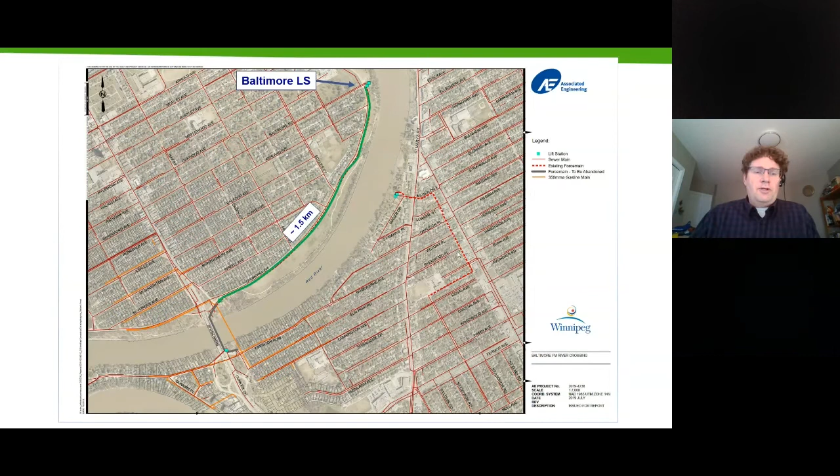So here's just a look at the rest of the system in place. We have the Baltimore lift station up here in the north, which would pump through a 1.5 kilometer force main to get to the actual St. Vital Bridge crossing. There's where we had the actual Baltimore force main crossing itself, and then it would again go by gravity or force main kind of gravity back up here to the Mager lift station, and then it would be pumped into this dash line to get into the rest of the system.

So when we're taking a look and developing options to replace this, some of the things that came up is that we noticed that we have this lift station up here in the north. We're actually pumping just over here, but in the end we got an extra 3 kilometers of pipe that takes us over to the Baltimore force main crossing. So these kinds of things came into play, and we're looking at different options, like can we short circuit this and just directly deliver from Baltimore to the Mager lift station and avoid 3 kilometers of this force main?

So we're going to move in and start talking here about some of the different options. I'm fast tracking some of the front end stuff because the back end stuff was much more exciting in terms of the concept design.

So how we did the concepts was we looked at various options. This is part of the decision-making process: we develop these options, take them up to a concept level of design, put together a description of how it works, pros, cons, and then put together a cost estimate so that we can actually make some decisions or help us make our decisions.

So the first option is relining with cured in place pipe, which is taking the existing pipe and just putting a liner through it. Slip lining is putting a structural or flexible liner through this. Replace in kind is essentially taking it off and putting it back exactly the same way. All these things had, on the piers, some cradles for the pipe that would have to be replaced.

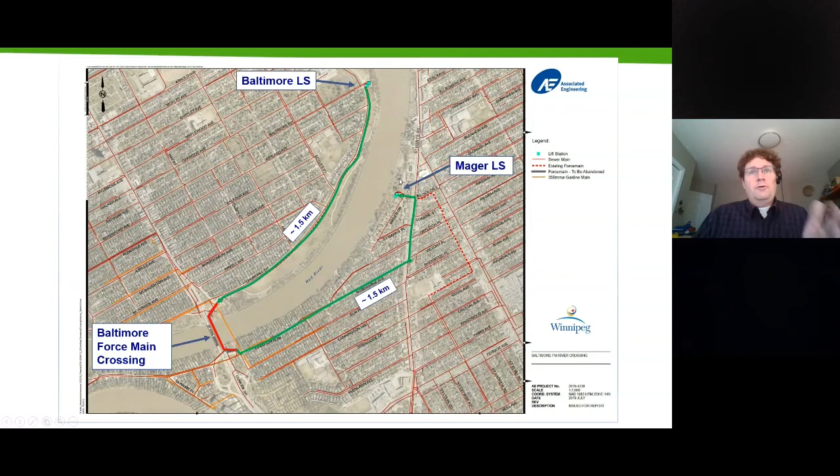Option 4A and 4B is microtunneling. 4A was, going back here really quick, the alignments closer to the bridge. The B alignments are trying to do the short circuit going from one lift station to the next. So that's where that A and B option comes into play. We had A and B options for microtunneling and directional drilling, and then we had the weighted pipe option, which was essentially to put a weighted pipe, high density polyethylene, across the river to convey the flows.

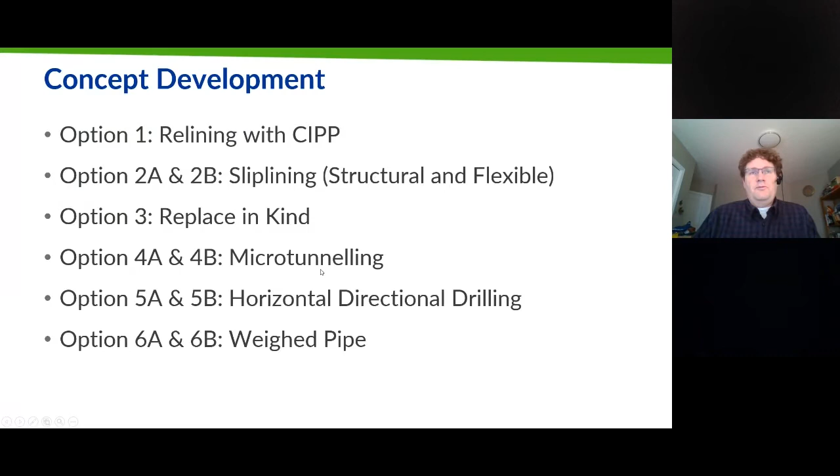Now we get into it, skipping a whole bunch of steps, but in that process we developed some evaluation criteria specific to the project, working with stakeholders and the owner. We developed these criteria which we want to evaluate the different options against each other. We take the evaluation criteria and do what was called a pairwise comparison, ranking those against each other to determine which one is more important, and how much more important.

That leads us to developing a weighting, and you can see here that we get a weighting for these different criteria. In this case, with the stakeholders and for the purpose of this project, operation, maintenance, performance uncertainty was one of the highest weighted criteria when it comes to making a decision. Things like social impact, infrastructure security, and schedule were lower. It's not that we didn't care about them, it's just that the group felt these other criteria were more important and had more weight on the overall decision-making process.

So then we have our different options listed on top. We have quite a few of those, and we go through as a group and compare. So in terms of environmental impact, which option would have the least environmental impact?

And so we give that a high score, 10. Then we come back and compare each of the other options to our initial high score to determine how they relatively compare in terms of that criteria we're evaluating. In the end, what we get is if we do a sum product where we multiply the weighting by the score given, we get the total criteria score down here in the bottom. In general, the one with the highest criteria score would be the one we preferred to take forward into preliminary design, detail design for the project.

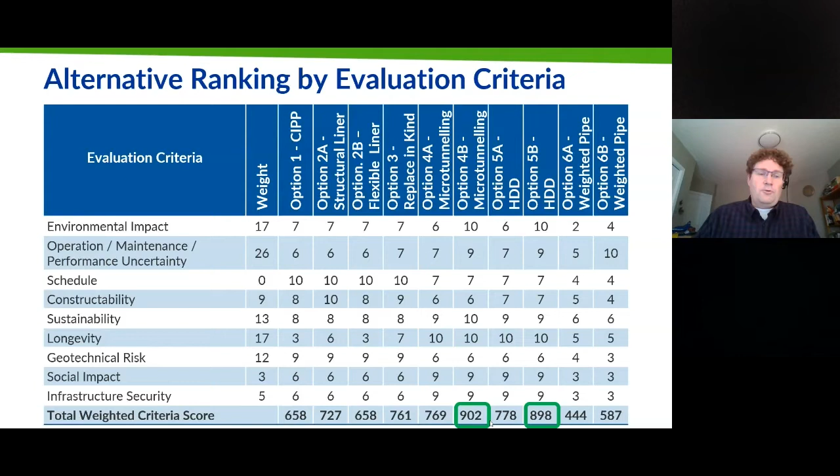So here we see that microtunneling option 4B and HDD option 5B were the highest rated criteria options based on the criteria and process we went through. Those are the options that were short-circuiting the installation.

So we go through and now we do what we call a value ratio, taking the estimated capital cost of construction and the total weighted score divided by the estimated cost, and we get the value ratio. You can see the flexible liner comes out at 233, and the higher the number, the better. So right away we see some issues: the ones which ranked highest in terms of options aren't even close when it comes to value ratio. It gives a bit of a contradiction.

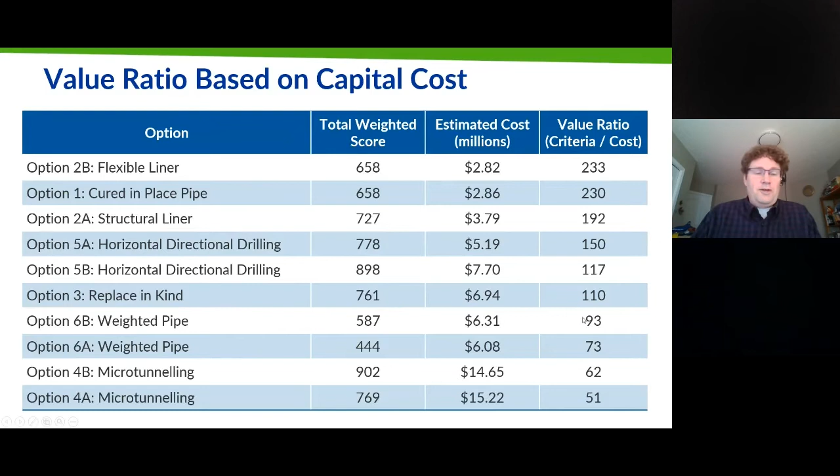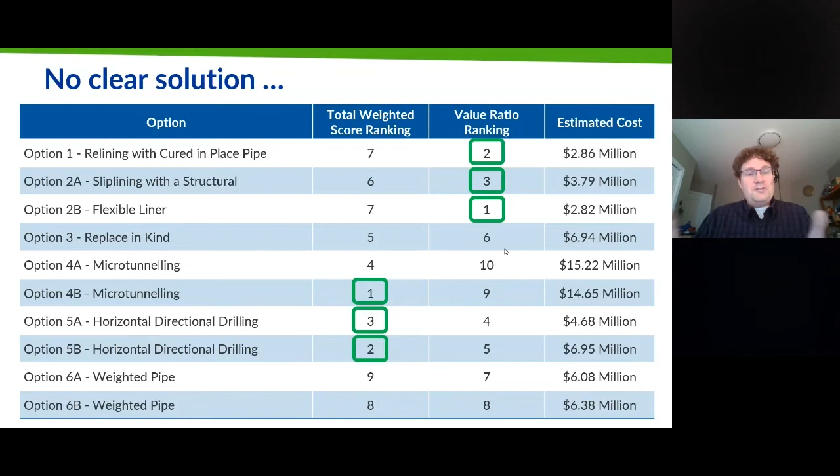So we need to go in and do some additional investigation. Here we can see the options on the left, with the total score ranking from the criteria — just a numerical ranking. Microtunneling 4B had the highest score. In the value ratio ranking, the flexible liner had the highest score. You can see this discrepancy — none of our options actually line up in terms of what's great from a criteria perspective versus the value ratio perspective. So it's like, well geez, what's going on here? It doesn't always happen, but it requires you to do some thinking to make sure we're making the right decision.

What comes into play is that each of these options is a little bit different. Some of the short-circuiting options had a definite impact on the long-term operation and maintenance costs, because if we're short-circuiting and we don't have 3 kilometers of forcemain, that changes how those pumps act and the maintenance and activities required by the city to keep the system working. So we looked at the total life cycle costs, because they're not all equal — some would be a short-term solution with maybe only a 10, 20-year design life, meaning we'd have to do something again. Others, like the drilling option, had a 50, 75-year design life. So there's various differences in terms of design life and operational maintenance.

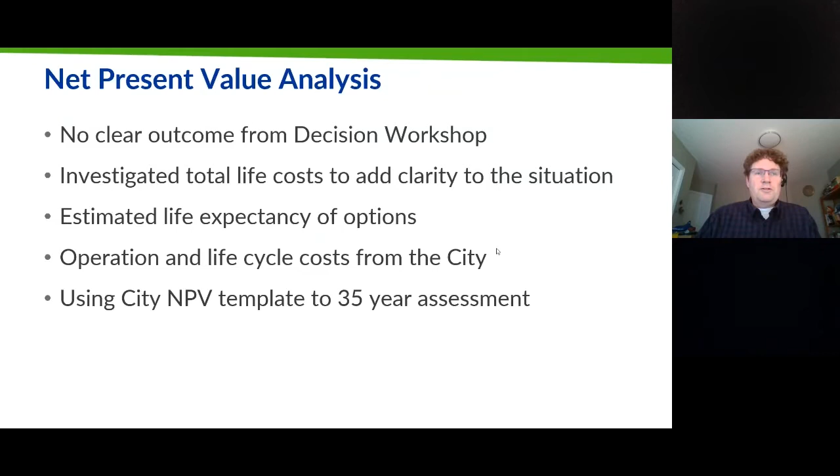So we go through, and Cynthia from the city used a net present value template for the 35-year assessment. Once we did the net value assessment, it started to make sense. Again, we have directional drilling coming in as the preferred option — 5A being more or less parallel to the bridge, with option 5B being over closer to the lift stations. Then it became clear that the next best was the replacing option.

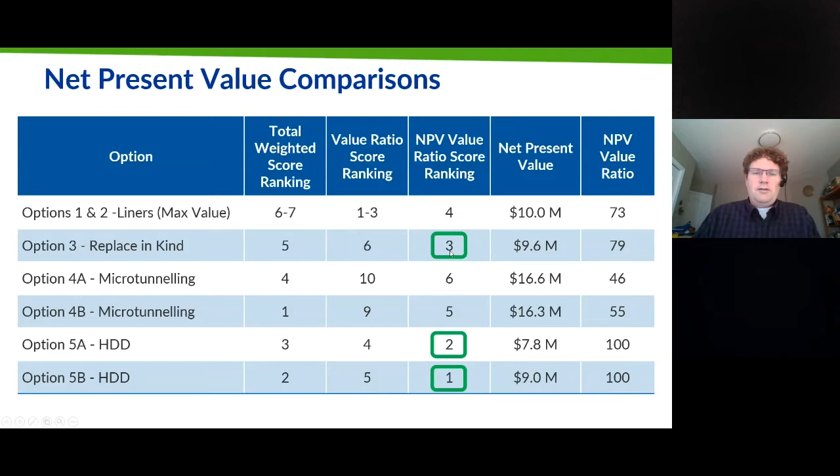All right, so we're still moving forward thinking we're doing directional drilling — things are going great. Now we start doing the concept validation. We reviewed options 5A and 5B, and looked at option 5B initially because it seemed to have the greatest benefit from an operational maintenance perspective, since we're short-circuiting it. Option 5B was about 540 meters in length and had a bit of complex geometry, which I'll show you right away. We had some concerns about that geometry.

There's one thing to put things on paper, and that looks kind of nice. The City of Winnipeg has some interesting geotechnical and geological features, with overburden material over top of bedrock, which does cause some issues. And the bore path we proposed was fairly complex in terms of both horizontal and vertical curves.

And so we brought in a contractor to help us do a constructability review, to make sure we weren't crazy moving forward.

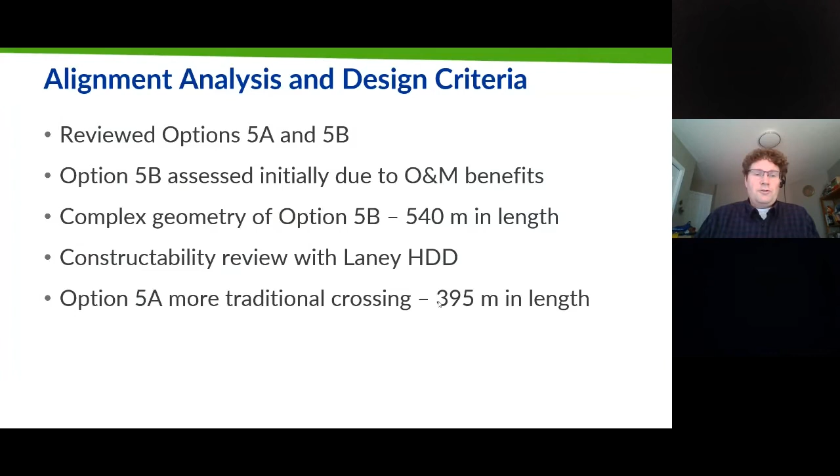Option 5A was much more traditional in terms of a straight profile, and it was just under 400 meters in length. So here's option 5B over here on the right-hand side.

On the north side, the top side of this picture, you can see the major lift station. There's a lift station up here, and then we come down to the major lift station down here on the left-hand side. And so the entry here, and complicating this also, was the slope stability.

There's a lot of erosion occurring here and instability in these banks along the Red River, and it kind of forces us to put our bore path in a location that's not going to be impacted by the slope stability. So we couldn't do a traditional straight across. We had to come in parallel on the entry and then start doing our curves underneath the slope stability.

By this time, we were going to be in bedrock so that we can do all our steering within the bedrock. And if we knew we're in bedrock, we'd be out of that slope instability area. So that's where you get this bit of horizontal curve and vertical curve occurring at the same time, just trying to avoid that slope stability.

So this was option 5B, and we're going through to do the feasibility of this.

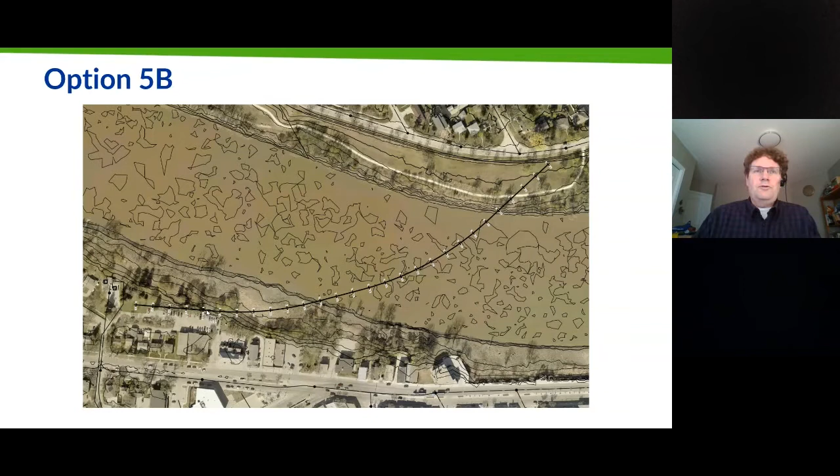Option 5A was much more traditional. There's nice working space on either side in these green spaces, and that allowed us to do just a straight shot going across, just under 400 meters.

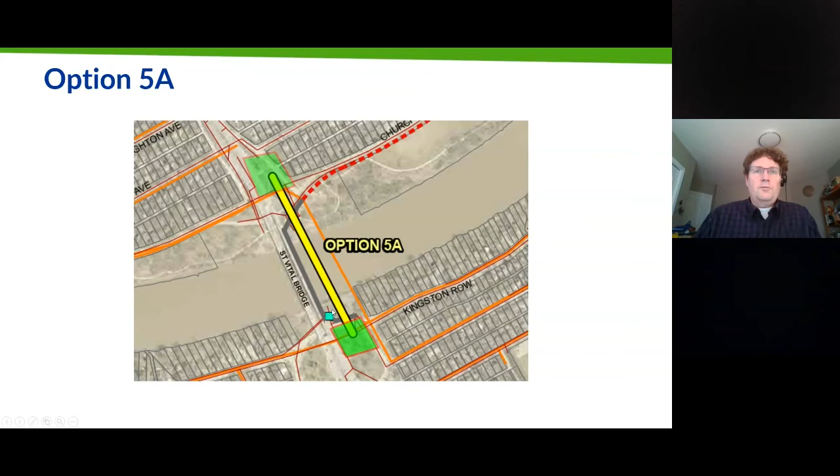So we go out, do the site reconnaissance, we do the riverbank stability, and identify locations for geotechnical investigations.

Essentially, and I guess I missed one point here, is that when we got into option 5B and started looking at the workspace and the constructability, we didn't get good reviews from the drilling contractor. And so that kind of forced us to consider that if the contractors are not saying this is feasible...

We can't take that design. And really what the feasibility comes down to is trying to make those complex steering arrangements within the bedrock. And they were concerned that they just wouldn't be able to make some of those things work.

And that was before we had geotech even. So we kind of knew from other work we've done in Winnipeg. We've done another crossing further down by Chief Peguis, the bridge there - the Kildonan Forcemain crossing. So we knew the geology there, and we understood that the bedrock was kind of complex.

So then we said, okay, option 5B is off the table. Let's go to option 5A now. And so we focused our geotech on option 5A.

So we got 2 boreholes, 46 meters in depth. We had the profile already set up so we can tell the geotech to get down to their appropriate depth. Samples were taken to determine the relative strength, the gradation, the plasticity, and the abrasivity.

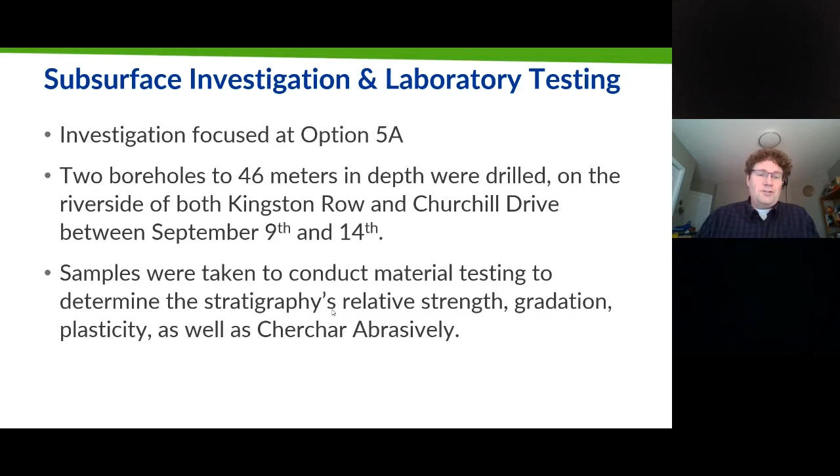And those are things which are important from a contractor's perspective, so they can understand what tooling they're going to need. It's very important - we're not doing a geotechnical baseline report here, but at least we're getting some information to the contractor so they can size up some of their tooling needs.

Soil stratigraphy, no surprise here: clay, silty clay, silt, sands, gravel, bedrock. Trek Geotechnical, local there to Winnipeg, did the report.

One of the things that kind of came up here, though, is that the subconsultant that did the drilling - we had conversations with them, and the words were 'never seen this formation before in Winnipeg, the most difficult drilling we've ever encountered in Winnipeg' - raised a few alarm bells, right?

And it really came down to the fact that in this location, there's a fairly unique formation, alternating between very competent hard material and very soft rubble material. And the issue here is that from a steering perspective, even if you're trying to get down, if you're skirting across these hard layers, you're going to extend.

You won't have the steering response you're expecting. And then you get into these soft rubble layers, and all of a sudden now you've got circulation issues - you can't maintain the circulation inside your borehole. And everything was hydraulically connected, so there could be potential for some frac-outs. And again, they had significant difficulty drilling the boreholes.

Here's just a cross-section of the area here. Here's the inferred bedrock contact layer. And you kind of see, you got the clays, you got the tills, and it was this layer here.

Realistically, I'm not sure if we would have looked at the geotechnical report on its own, without talking to the driller, if we would have interpreted it the same way. So a lesson learned from us is that it was important to talk to the driller that was actually doing that work to get that hands-on experience and understanding of what the ground was doing. That was a real lesson learned there, that the benefit of actually talking to the geotechnical consultant in this case really led us to understand what the difficulty was and what the concern was moving forward on this installation.

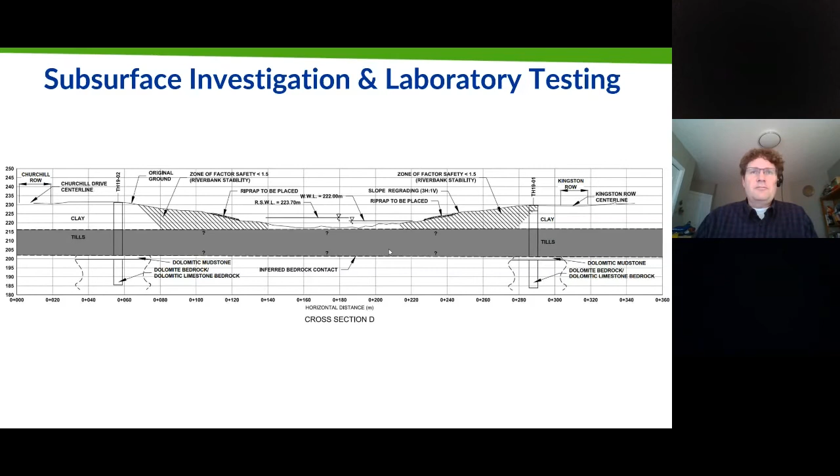One of the things that really causes us a lot of problems sometimes is not getting geotech at a sufficient depth. It happens to us all the time. We have an open cut project where we need to make a quick change and move over to do it by trenchless, and we get in a situation where the geotechnical information we collected for the open trench type operation is not deep enough or doesn't have the applicable parameters that would be used from a directional drilling design perspective, or to give the contractor the right information to plan their installations.

That's where, working with Trek, we determined what that bore path was and said we need these boreholes being 46 meters deep. I think it was even maybe a little bit deeper, because I think we're drilling at maybe 30 meters deep. This gives us an opportunity to get to know what that ground is below the proposed bore path.

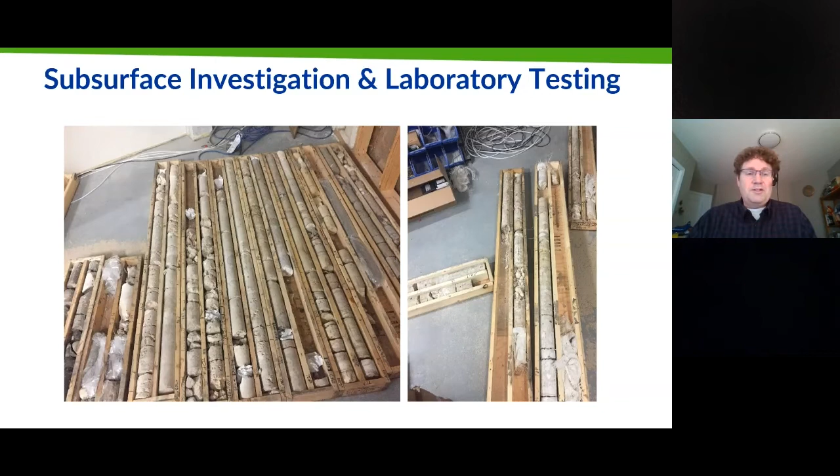All right, so subsurface investigation. Might just summarize some of these things again. So, concerns of the formation: I talked about loss of circulation. In terms of the amount of fractures, we may have issues trying to keep the borehole full of fluid. And the circulation, again, it's not because of frac out. It's just because we want to make sure we have circulation. If we have circulation, we can keep flushing the cuttings out of the hole.

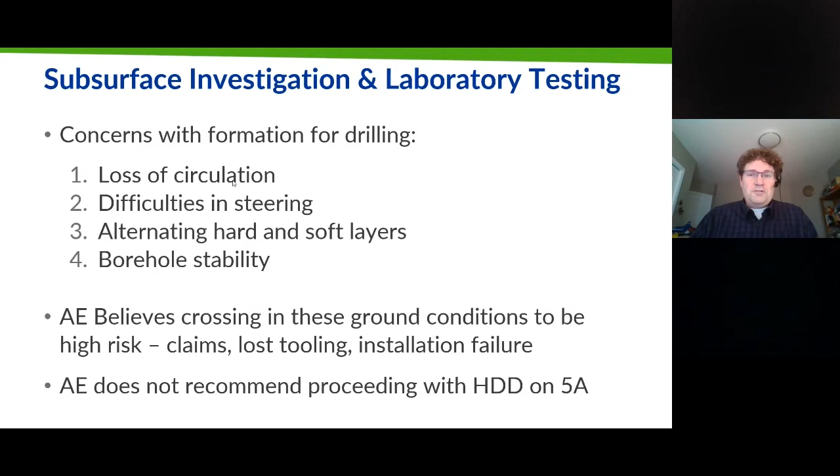So that's where that loss of circulation comment comes in. Difficulties in steering, we talked about that, the alternating hard and soft layers, and then the borehole stability. So at the end of that, unfortunately, we had to conclude there was a high risk of drilling this, in terms of potential claims from the contractor, losing tooling down hole, and even installation failure. So we actually had to recommend against directional drilling, and unfortunately it became a non-trenchless project.

So we did have some geophysical survey that was going to be on order. But really, once we did the boreholes, we came to the conclusion that based on what we saw there probably wasn't any real reason to do the geophysical. It wasn't going to tell us anything more. In particular, in terms of the way the layers were set up, geophysical is great to identify those massive or significant changes between soil consistency. So if we have these alternating layers of hard and soft, I don't know if it would have really defined anything more than we knew from the boreholes.

So then that's another lesson learned here, about that staged approach to doing geotechnical investigation - really taking the geotech, analyzing it, and then making a choice moving forward in terms of if we need more geotech or a different thing like geophysical.

So, conclusions, recommendations. We revisit the net present value, and in the end, when option 5A and 5B didn't turn out, the next best was a replace in kind. City of Winnipeg, I believe this is the option they're pursuing right now, and it's been a while.

The City of Winnipeg had to set up an emergency kind of bypass, or temporary bypass type situation, over top of the bridge. So they've unfortunately been moving sewage to the forcemain on the bridge for at least a year and a bit at this stage. The benefit of having that there is that once the replace in kind is moving forward, at least that bypass is in place, and it's one less thing for the contractor to worry about. So that is underway, I believe - I'm sorry, I didn't check on the status of it actually.

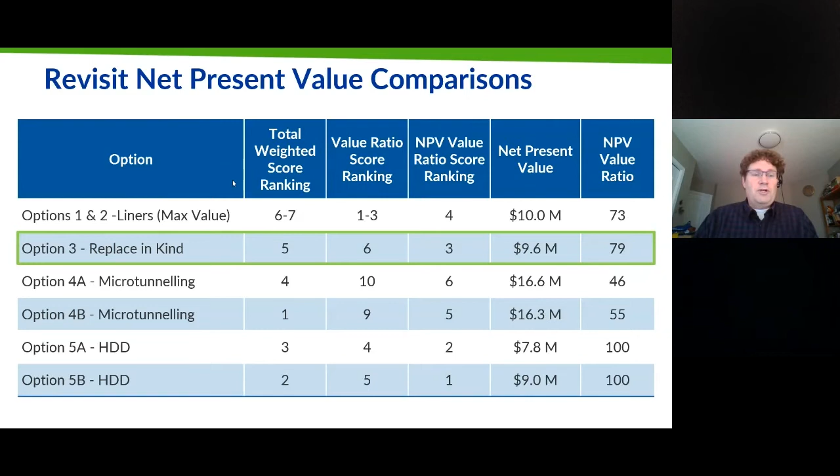All right, so conclusion and recommendations: abandon the HDD crossing at option 5, proceed with option 3, replace in kind.

That's right. Thanks very much, Carly. Appreciate the intro, and welcome all. Thanks for joining me and for the opportunity to present on behalf of our team here. So I've been designing water supply infrastructure in Metro Vancouver for several years now, but I'm normally called in at the detailed design stage, and getting involved at the ground level for the Cambie Richmond water supply tunnel has really demonstrated to me the power of GIS for decision support.

So I hope I can convey some enthusiasm for the approach we've adopted here. I'll give you a view of the early stages of conceptual design, starting with background and scope, conceptual design objectives, and going through the spatial decision criteria. I'm going to roll out some of the multi-criteria spatial analysis figures, the results of these analyses, and our next steps.

The Cambie Richmond tunnel is intended to be an extension of an already well-established water supply network. This corridor has been an important artery for transmission mains since at least the 1950s, with mains from the north conveying water from the Seymour and Capilano watersheds to South Vancouver and through to the cities of Richmond and Delta via existing Fraser River crossings.

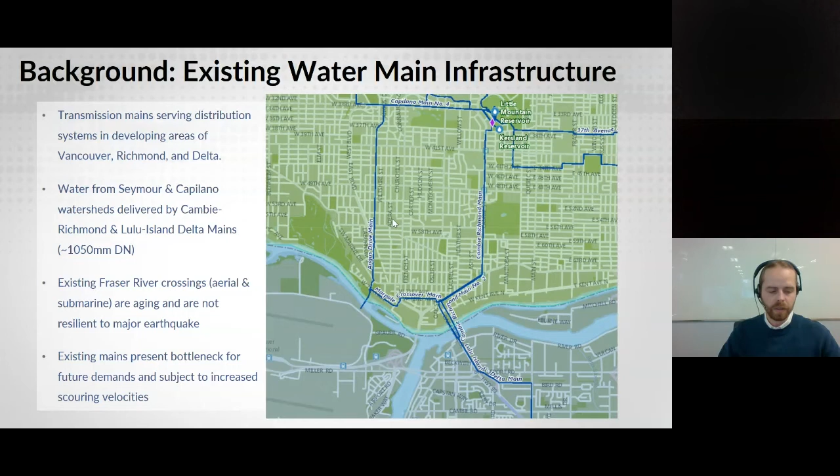As you'd expect, these areas are rapidly urbanizing with Canada Line SkyTrain stations on both sides of the river. Careful water planning has been undertaken to project demands out to year 2121, and these existing crossings present a bottleneck in the near future. Existing infrastructure is aging, and seismic resilience is a concern, so these are to be designed for a 100-year horizon and to modern seismic criteria.

And at the end of the day, large diameter open cut water mains need to be established to tie in the tunnel into the existing supply and outfeed.

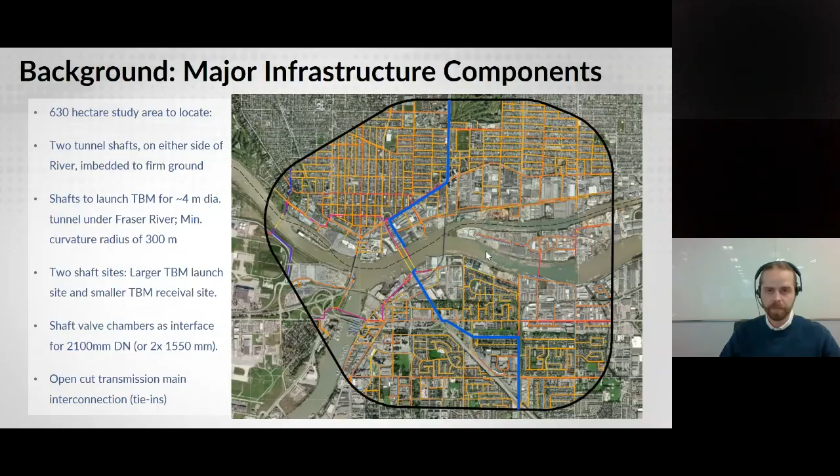So the primary undertaking for evaluation of shaft site locations is no simple task for a 630 hectare study area extending across 2 municipal jurisdictions.

To begin with, we compiled decision inputs from regional and municipal geospatial models, the majority of which is readily available free data. We integrated situational, geotechnical, and constructability considerations into our multi-criteria spatial model. This data provided the high-level view, but the real objective was to strategically overlay and manipulate these models to focus in on a long list of suitable sites.

Alongside reconnaissance observations, we collaborated with Metro Vancouver and our technical leads to shortlist 3 shaft sites on the Vancouver end and 2 sites on the Richmond side. And to further demonstrate their suitability, we developed conceptual plans and profiles for 4 potential tunnel alignments.

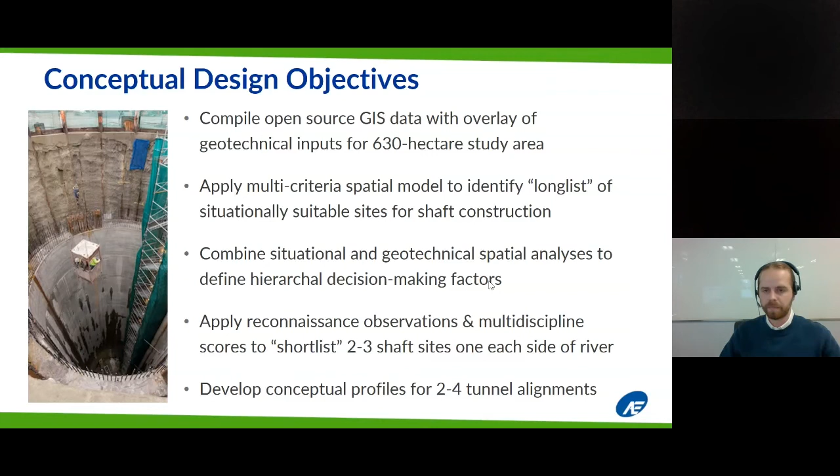Starting with the obvious one, we require adequate real estate for the shaft infrastructure, as well as construction laydown and access. We targeted industrial and commercially zoned areas to mitigate construction impacts on residential areas and also to allow for use of well-established haul routes.

We aim to optimize capital expenditure by minimizing tunnel length as well as length of open cut tie-ins. From a geotechnical perspective, we endeavor to find firm ground to embed these shafts. As you'd expect, shaft installations near the Fraser River will be affected to a significant degree by soft soils, so we target sites with shallower liquefiable layers to limit dynamic effects during an earthquake.

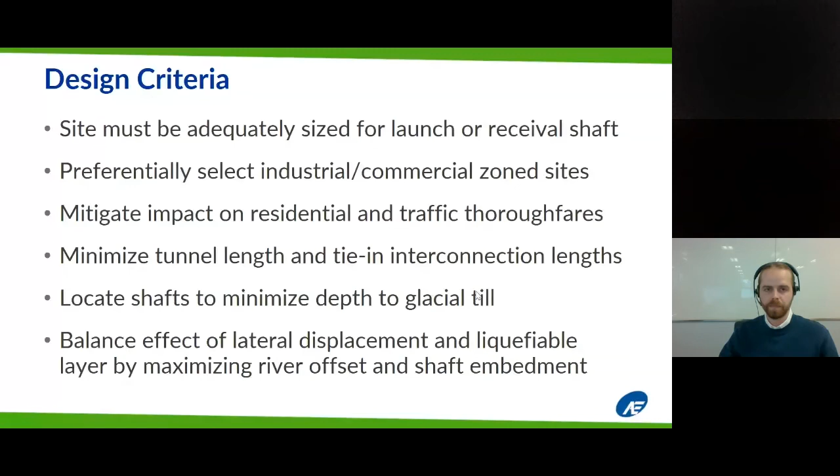So let's roll out some of the spatial data layers we use to illustrate these criteria. You'll notice on all of these maps we show the Cambie, Richmond, and Lulu Island Delta mains in blue as a visual indicator of the tunnel supply source and destination. Note that this transmission main generally aligns with the Oak Street Bridge, and in purple we indicate the alignment of the Canada Line SkyTrain. These are shown common to each layer because in the end we want to avoid threading a tunnel between the piers of the bridges.

At this point, it was prudent to consider registered sites with social, environmental, and archaeological relevance. We use this layer to make designers aware of things like heritage sites, schools, care facilities. We also masked off the riparian offset for the Fraser River, and on the left in turquoise we've identified a registered archaeological site.

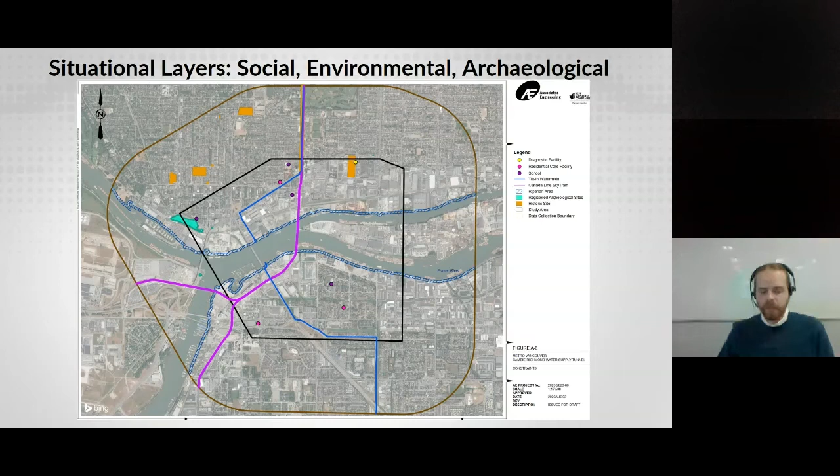So logically, we developed a no-go mask for areas we want to steer clear of. To this mask, we added the frequent transit development areas near the Marine Drive SkyTrain station, as well as the TransLink operation and maintenance facility on the Richmond side. This layer made it clear how congested these pre-developed areas are becoming. The challenge became even more evident during reconnaissance, as we found well-established industries and stratas have been replaced with new commercial developments like car dealerships and self-storage facilities.

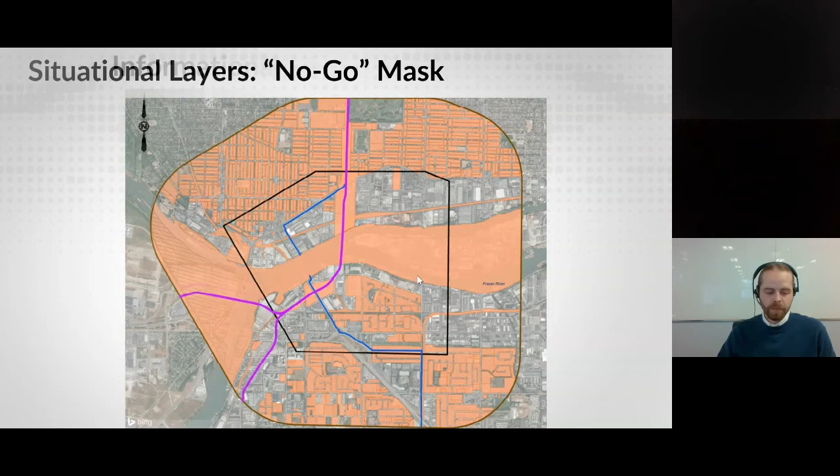So with the mask now laying out some more boundaries, we could begin the constructability conversation. With help from McMillen Jacobs, we defined the spatial requirements for construction of shaft infrastructure. We need at least 8,000 square meters for the TBM launch shaft, construction laydown, as well as muck disposal. And on the other side, we are looking for a minimum of 4,000 square meters for the TBM retrieval shaft.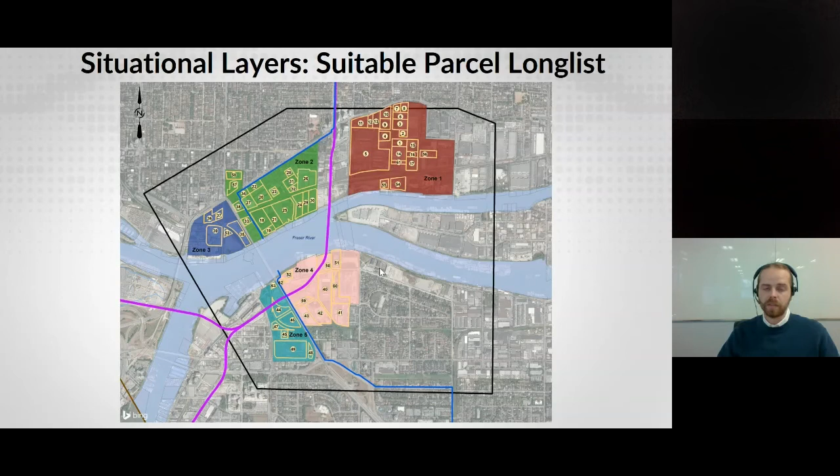So the obvious spatial model outputs will relate to length of tunnel infrastructure. And this would include the length for open cut water mains to tie in the shafts to the existing water supply. We developed spatial bands around the Cambie, Richmond, and Lulu Island delta mains. And each band is assigned a score, ascending with proximity.

For instance, a shaft site located closest to the supply is assigned a higher band value, and is shown in the green areas.

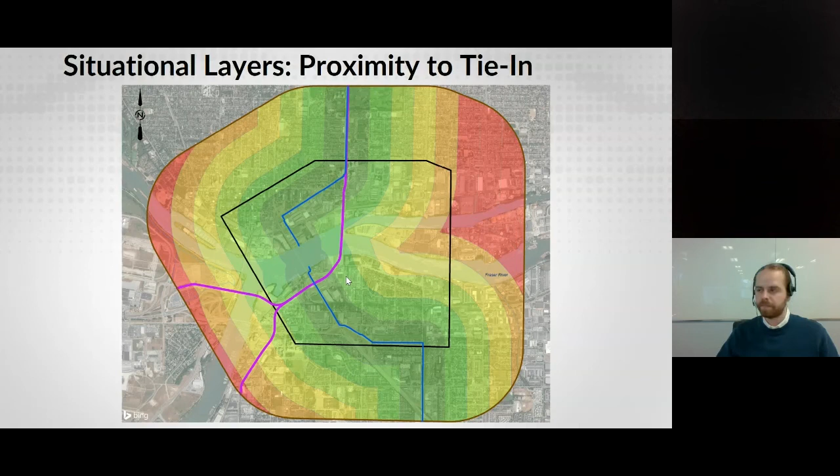Next up is tunnel length. And given that we were trying to align a tunnel between shaft zones that are directly across the river from each other, we generalized that shaft sites located closest to the river will result in the shortest tunnel length. Again here, shaft sites located in the green band are assigned a higher value.

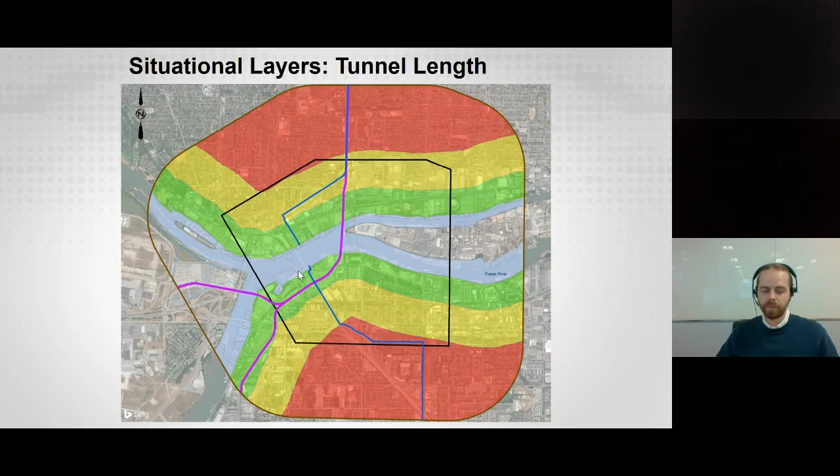Which brings us to our first multi-criteria layer. This is the combined situational analysis. Rather than reporting spatial values in a massive spreadsheet and straining the eyes of our collaborators and clients, we document these results of the analysis visually. And what we've done here is manipulated the value outputs from the land use, proximity to tie-in, and tunnel length layers, and we've assigned weights to each of them based on agreed upon design relevance.

You can see some clearly defined favorable areas beginning to arise here, especially near the river shore and along the existing transmission line. But using the situational layer alone might wind up locating shafts in areas with suboptimal geotechnical conditions.

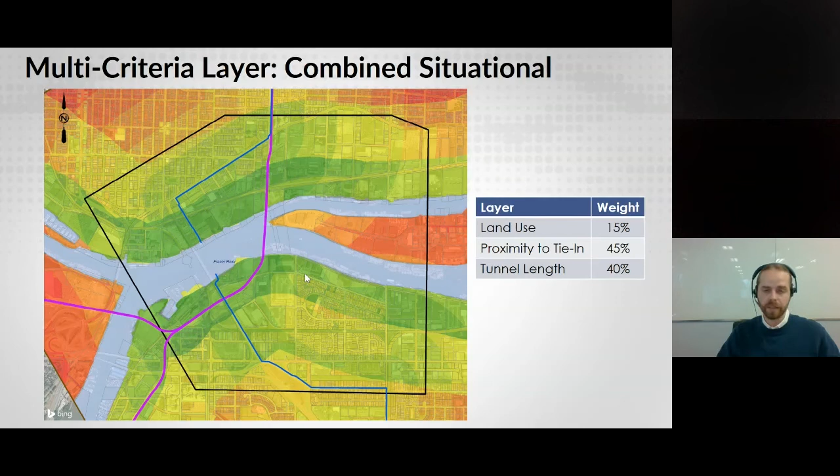So we turn to our geotechnical lead, Golder, to help steer the ship. And within the study area, we were able to pull geological data from a fair number of existing boreholes. Golder used Leapfrog software to develop spatial geotechnical models. As I understand it, this software essentially interpolates between boreholes to efficiently trend geological conditions across the study area.

So one of the most important geotechnical considerations is the liquefiable layer thickness. This includes soft soils such as river sands and marine sediments that are subject to lateral displacement in the event of an earthquake. If this liquefiable layer is exceptionally thick at the shaft site, the shaft needs to be designed with enhanced capacity to overcome lateral pressures.

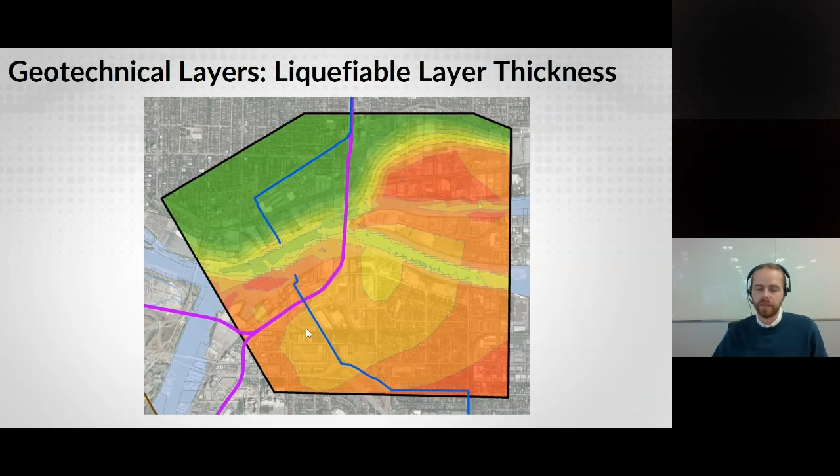And as you can see, there are some problematic areas in the northeast corner in Zone 1, as well as deeper pockets within Zones 4 and 5 on the Richmond side. Similarly to the situational layers, these contours represent a severity value, with red areas assigned lower scores.

Now, depth to glacial till is a parameter that our tunnel and shaft design lead is particularly interested in. They want to know how deep the shafts will be and how deep they'll need to be installed in order to embed them in firm ground. The green band indicates depth to till less than 40 meters below sea level, while red indicates till at greater than 80 meters below sea level. So that's quite an aggressive grade to this deposit from north to south.

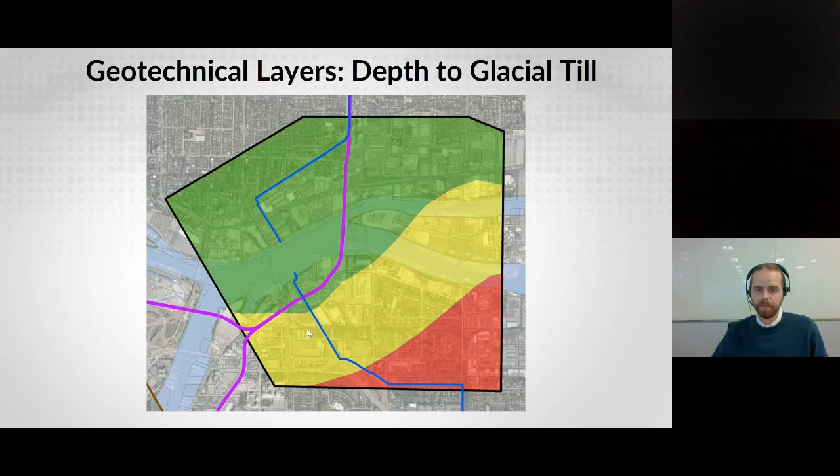Lastly, for our geotechnical layers, we spatially approximated the severity of lateral displacement. Illustrated here, the bands in red are displacements of greater than 3 meters. In yellow, it's between 2 to 3 meters. And in green, that's less than 2 meters.

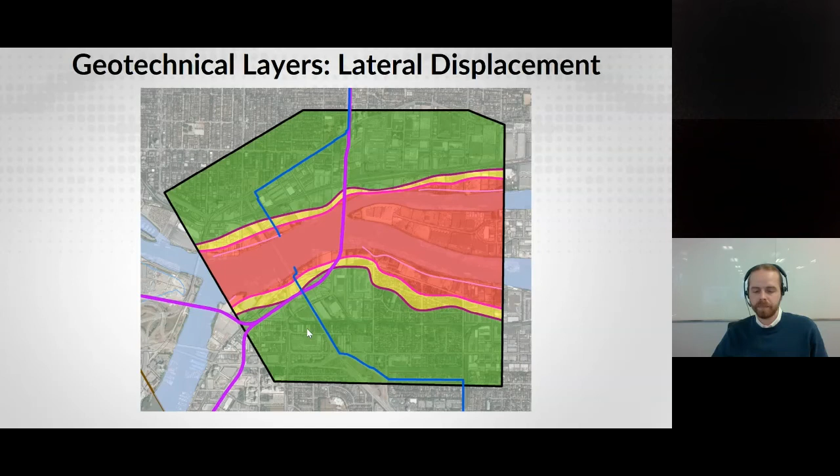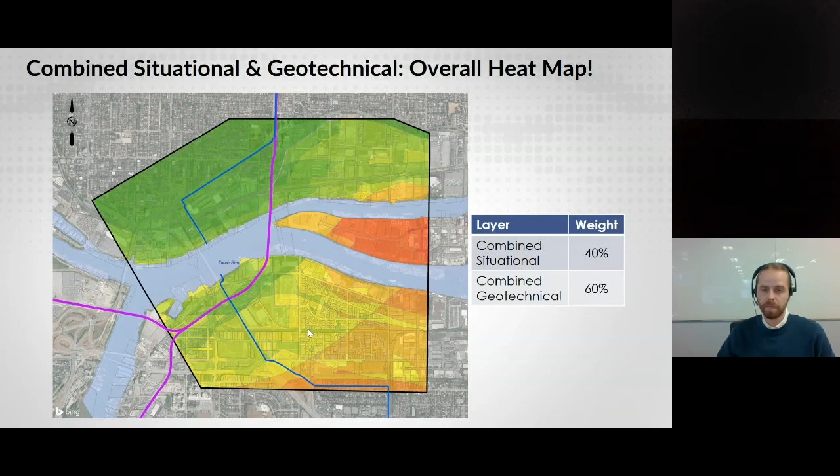So, results and next steps. Why go through the trouble of creating composite maps for site selection? Well, the real value comes from multidiscipline collaboration. And with these visual cues, we curb the tunnel vision you might experience if you're simply focused on satisfying discipline-specific design criteria.

To the team, you can more effectively communicate why you prefer particular shaft sites. Our goal here was to provide shaft site options. In the end, it's up to the client to select which ones, and these spatial figures provide a documented roadmap on how we arrived at these options.

These tools are essentially created to streamline the process of secondary screening, where we shortlist 5 out of 61 sites. We later had help from Metro Vancouver property specialists to weed out parcels that might be difficult to acquire. And later, through our site reconnaissance efforts, we visited most of the sites to see what was actually there, in some cases revealing that a parcel is now empty or redeveloped, or a railway spur has been abandoned.

Now, with the high-level composite maps and the secondary screening results in hand, we're able to hold a multidisciplinary workshop and agree upon the actual site selections. Between these options, we identified 4 possible tunnel alignments, all of this before developing any drawings.

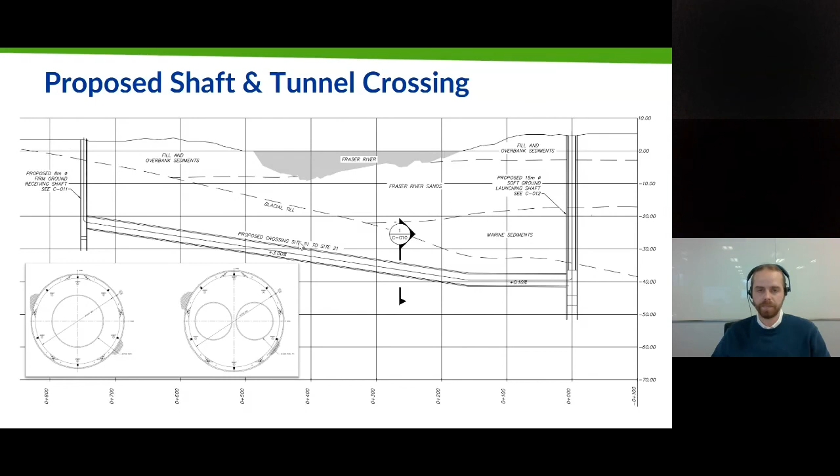So here we are, and where to next? Well, we found that the multi-criteria spatial analyses allowed our conceptual design team to execute site evaluations in a highly coordinated manner. The narrative for this process is clearly recorded in our project design report, and the client, or those building off of our work, can pick up this document, retrace our steps, and refer to it as they advise subsequent decisions.

So now, advancing into the subsequent tasks for the conceptual design, we have our AE environmental group investigating the selected shaft sites to evaluate environmental or archaeological concerns. We also have a drilling program by our geotechnical lead, currently underway at these sites, to verify the geological modeling results that were used for the basis of site selection. Finally, we're moving into the engineering assessment now, where we further develop hydraulic basis for transmission main sizing, shaft and tunnel design concept, and constructability considerations, which in the end will advise our recommendations and cost estimate.